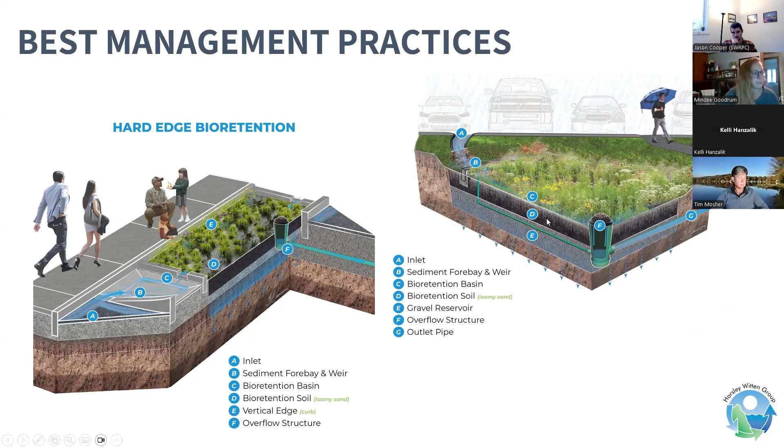Another of the practices that we've used as part of this project are called check dams. These are stone structures typically placed within ditches or swales, and their purpose is to help slow down stormwater flows through those ditches, particularly on moderate slopes. This will help reduce erosion by slowing down the water. It reduces its ability to erode the ditches as it flows, or things downhill of the ditches.

Slowing the water also can promote some level of infiltration as it sits behind each of these dams. It can allow some of that water to sink into the ground, which will help naturally filter out some pollutants as part of that process. It can also help reduce sediment loads to the lake by allowing the sediment to filter out between each of the check dams.

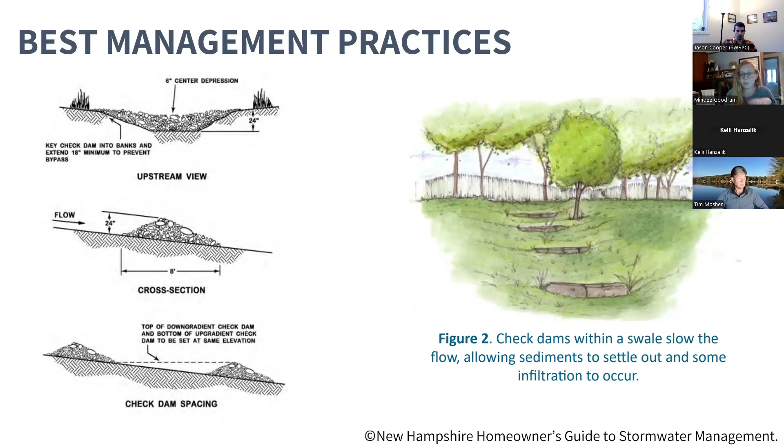Another one of the practices are rubber razors. These are a method of water diversion typically used on gravel roads or gravel driveways, sometimes along trails as well. Essentially, it's a piece of rubber conveyor belt sandwiched between a couple of pieces of timber. It's angled across the road or driveway to help divert the water into an area where it can be treated instead of eroding roads or driveways.

Typically, it would flow into some sort of dry well, which is like a dugout area filled with crushed stone that will help drain that water into the groundwater where it can be filtered before it enters the lake.

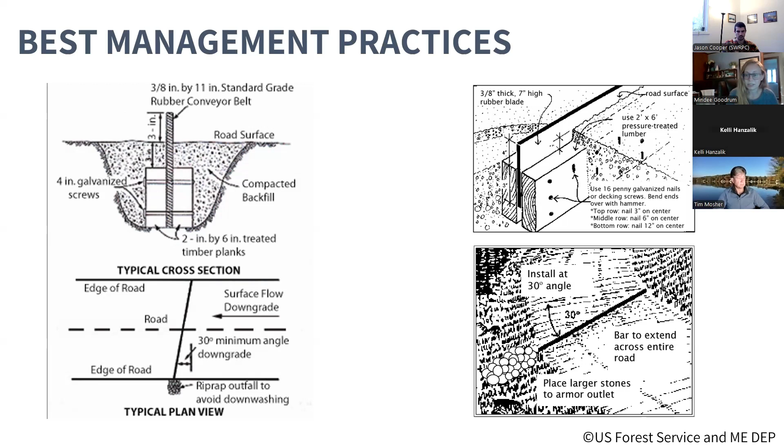All right, and now I'm gonna walk through some photos of the sites that we actually addressed as part of this project. The first, which many of you probably recognize, is the Spofford Lake boat launch parking lot. These are some photos prior to the project being conducted, kind of showing the conditions to begin with. We have a lot of impervious surface cover from the parking lot and the adjacent roads, which means the stormwater can pick up velocity and pick up pollutants from the parking lot and the roads where cars are pretty frequently driving, parking, gathering. So there's a lot of potential pollutants associated with a road like this and a parking lot.

We already have some existing detention areas. They didn't have any stormwater treatment in them at the time. There were some catch basins in the parking lot that would capture water and let it flow to the lake, but there was no actual treatment of the stormwater. That was just a method to capture and transport water out of the parking lot into the lake. There was also erosion observed at the outlet of that culvert that would take the water from the parking lot and put it in the lake. So we could tell there were some issues with stormwater volume and lack of stormwater treatment at this area.

So as mentioned, we enlisted our engineering partners to design some bioretention systems for the parking lot. This is just a small clip of the engineering plans, which you probably can't read very well on your screens, but it goes to show that there's a lot of pieces that go into these bioretention systems. So we ended up using those two existing depressions to form two different little cells of bioretention. Together, those would be outletted into the existing culvert outlet, which we added some rock protection to closer to the lake, and that's off the screen shown here.

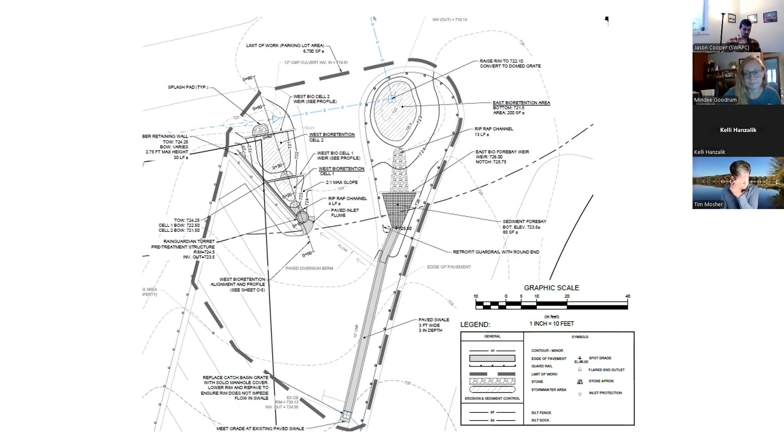Construction can be messy. Here's a few of the in-progress photos. It doesn't always look as nice while it's being constructed, but it's nice to see the progress of what's going on. So on the left here, you have a picture of one of the bioretention systems being dug out before they added in any of those layers of stone or plants, which you can see on the right here, where they've added some of those systems into one of the detention areas.

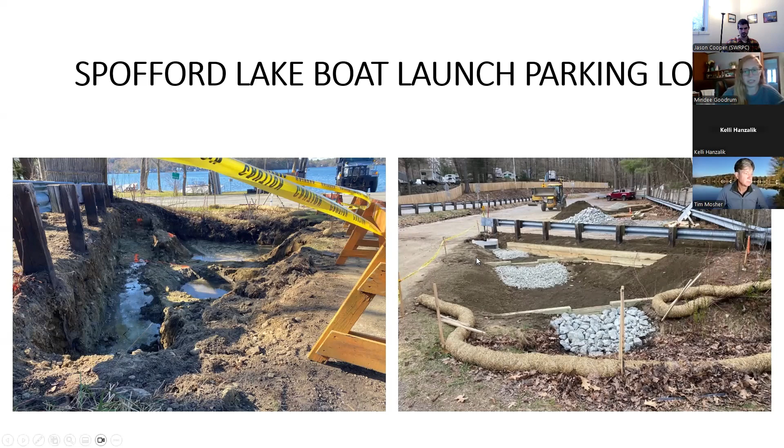And then this was constructed in the spring of this year. And you can see these photos were taken in September. The grass has come in nicely. When you're facing the lake, this cell here is on the right, so it's the larger one. In the left photo here, the rock area leads to some concrete pavers. This portion of the system helps to settle out the sediment before it gets into the planted area to make it a little easier to clean out and filter out that sediment.

Whereas on the right, you see the overflow structure in the middle of the grassed bioretention area. These systems are designed to treat 1/2 inch of runoff from the surrounding impervious surfaces and are estimated to reduce the phosphorus loading to the lake by an estimated 0.75 pounds of phosphorus per year.

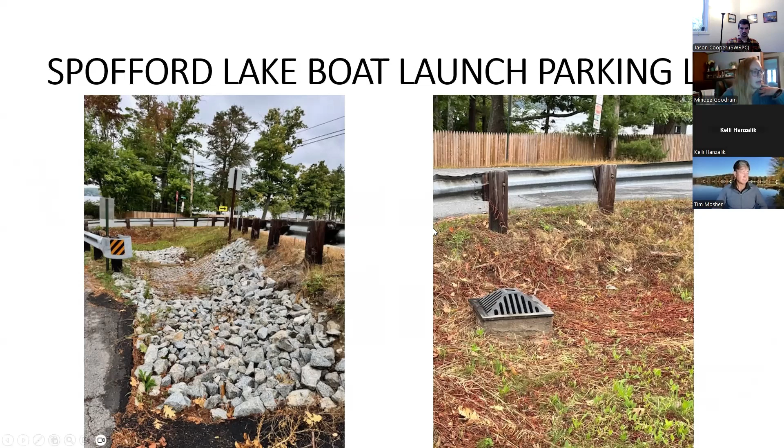And I have another set of photos from the left side of the parking lot. And this is, again, what they looked like just at the end of September, so pretty recently. These have what are called weirs, which are similar to check dams. You can see in both photos the timber structures with rocks behind them. This helps to control the flow through the system and again, helps settle out sediment at each of those steps.

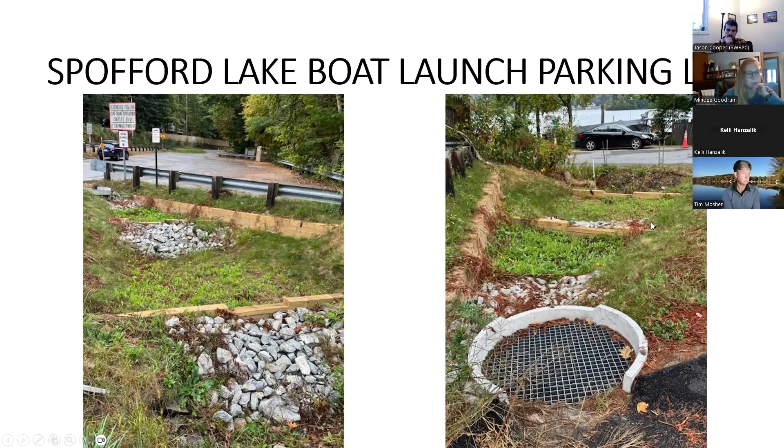Moving on to one of our residential sites. This is located on Linfield Lane in the southwestern corner of the lake. These landowners were experiencing high stormwater volume flows and erosion down a drainage channel that flowed water from culverts crossing Route 63. The amount of stormwater was eroding both their drainage channel and their neighbor's property. It was causing concerns for flooding and bringing a lot of sediment into the lake.

Moving on to another of our shoreline properties. This is from Lake Drive, and we have Tim Mosher here from Lake Drive in the northeastern corner of the lake. They also were experiencing high stormwater flows and erosion, this time along the road from steep slopes in the area that just transported a lot of water down their road and into the lake. This road had a couple of existing catch basins to collect the water, but it wasn't really being well directed into the catch basins. So they weren't necessarily being well utilized, even though they had some methods for capturing stormwater.

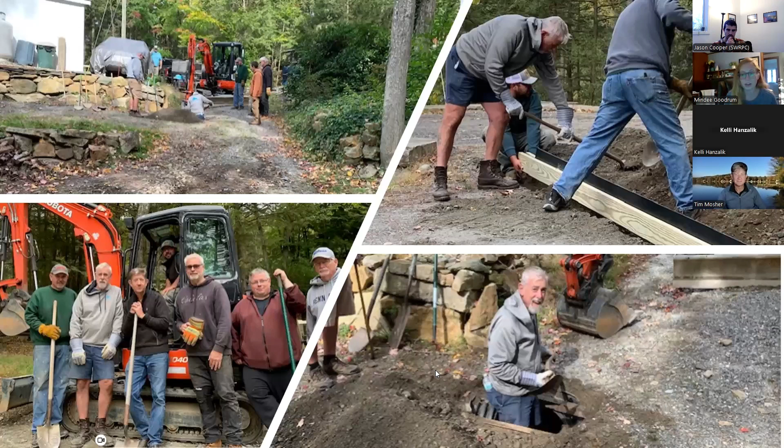And Tim, I don't know if you have anything you want to add about how this project went or what you learned from it. No, I mean, I think it was a real opportunity for us to come together. There were about 10 different homeowners that were involved in the project, and as you mentioned, prior to initiating the project, we had a couple years of pretty significant runoff, a lot of property damage, a lot of erosion. So we had a lot of motivated people that wanted to do something. And I think one of the nice things is that we knew we wanted to do something, we just weren't sure what we wanted to do.

And this grant really gave an opportunity to catalyze a very enthusiastic group and have us come together. And I think a couple of things that were really good take-home points, which you mentioned, was oftentimes it can be relatively minor changes to redirect some of those flows that actually have really significant outcomes. We look at this problem, it looks overwhelming. But I think we were able to take advantage of some great work the township did to redirect some of the stormwater that was coming off of North Shore Road. And that really allowed the changes that we made then on Lake Drive to be very effective.

And I'd say since we've implemented this, it's been about a year. We've really noticed a significant reduction in the amount of erosion that we're seeing on Lake Drive, and the amount of surface runoff that we're seeing coming into the lake. So I think it was a great opportunity.

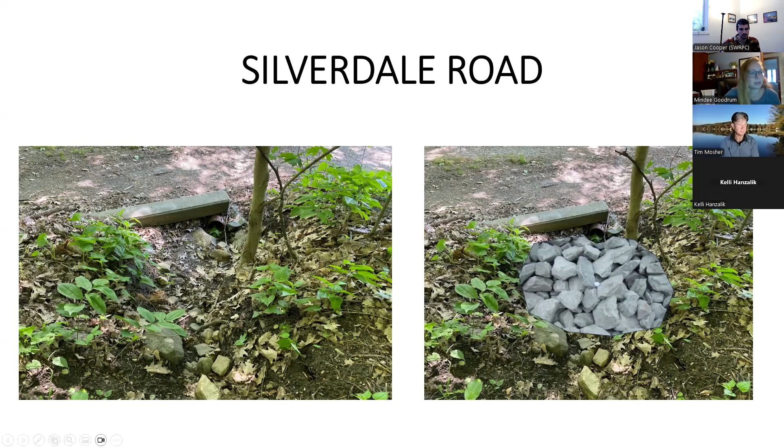And I don't have any additional photos, but as Jason mentioned, we had some extra funds available with the grant, and we're looking to replace a couple of extra pipes around the boat launch parking lot area, which are currently clogged and crushed and not functioning the way they're supposed to. By replacing those, it'll help promote proper drainage of those new bioretention systems and make sure everything's working and flushing properly. So I think those are all the slides I have, but I'm happy to answer any questions about the current project or any of the practices we've implemented.

Great, thank you, Mindee. If I might jump in here to kick questions off, could you give a recap of the total phosphorus loading that we're looking at reducing through all of the projects? Do you have those figures available? For just the current grant? Well, if you have the ones for the last grant, you mentioned that briefly. Maybe just all of them. That would be cool to see how we're faring. I know the total figure was like 42 pounds should be reduced, ideally.

Exactly, yes. So from the current grant, we estimate that the projects already completed should reduce phosphorus loading by about 3.1 pounds. That's not including the last couple of projects that haven't yet been completed. We'll finish those calculations after the projects are in the ground and we make sure the sizing and everything is the same as what we put in the plans, so our estimates are as accurate as possible. So that in combination with the 9.2 pounds from the first phase puts us at about 12.3 pounds, which is close to 30% of the goal, and we should get a little closer with those last couple of projects as well.